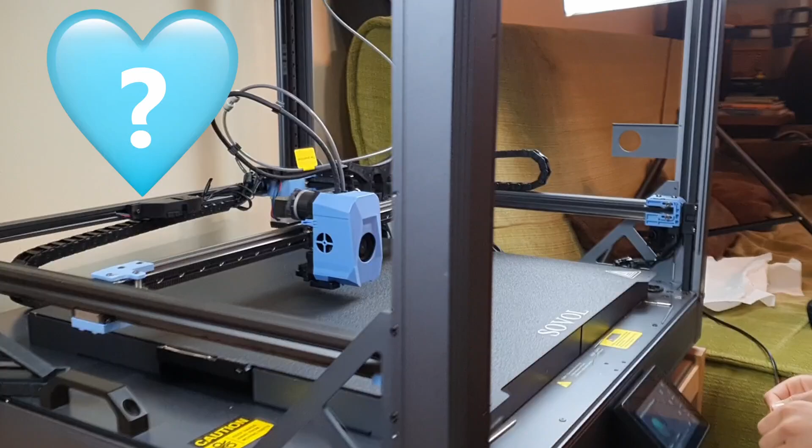Let's see what broke, what worked, and how we fixed it. And speaking of what really worked, there's one upgrade on this Max that, even with all these beta quirks, has quickly become our absolute favorite over the original SV08. I'll tell you exactly what it is before we wrap up, but see if you can guess it as we go.

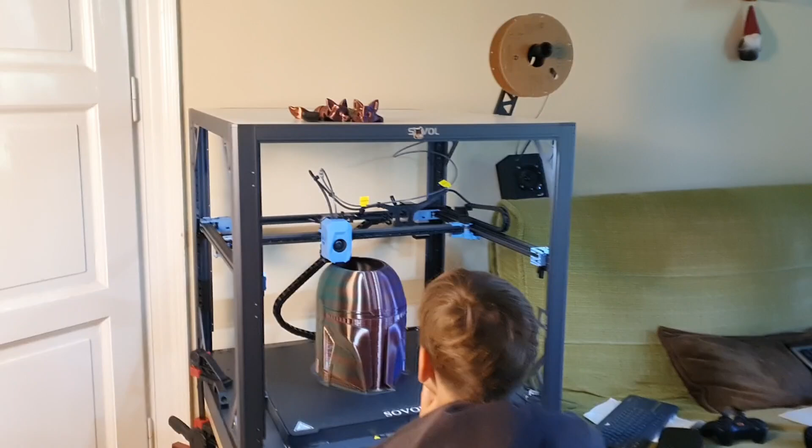Again, let me preface everything: this is a beta unit, so production machines can and likely will be very different. We will go from the most basic test prints to large functional and decorative items.

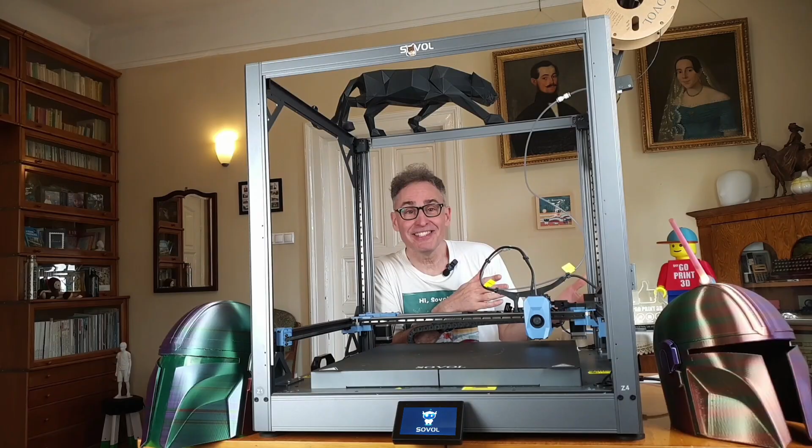Since we don't have an enclosure yet, higher temp materials are off the table for now, so we are sticking to PLA and PETG. And without the upcoming filament feeding upgrade, flexible filaments like TPU are also on hold for the time being. But even with these limitations, we will be destroying a hot end, accidentally scraping the bed, throwing out a good number of failed parts, and making plenty of software and hardware adjustments along the way.

Are you ready? Let's get into it.

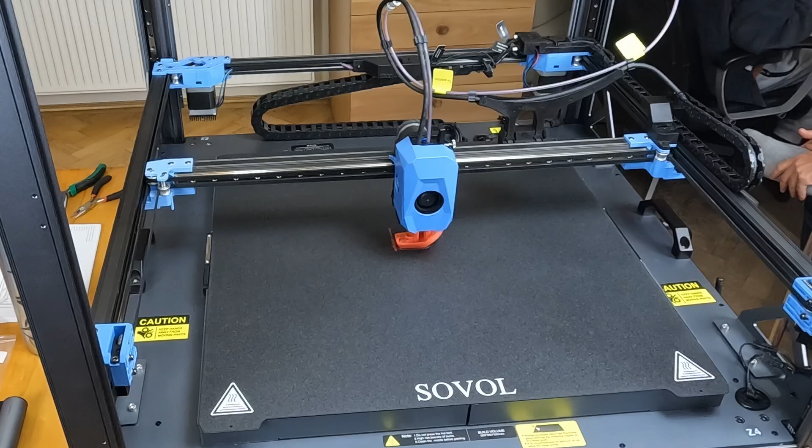Now let's kick things off with the first and perhaps most infamous test print, the 3DBenchy. Yeah, I'm sure you're not impressed by this one. The G-code for an 11-minute 3DBenchy was right there on the included USB drive, but straight out of the box, it just didn't print correctly. There was a severe under-extrusion problem, so bad in fact that the model snapped in half before it even finished printing. Definitely not the print that is going to sell the Max.

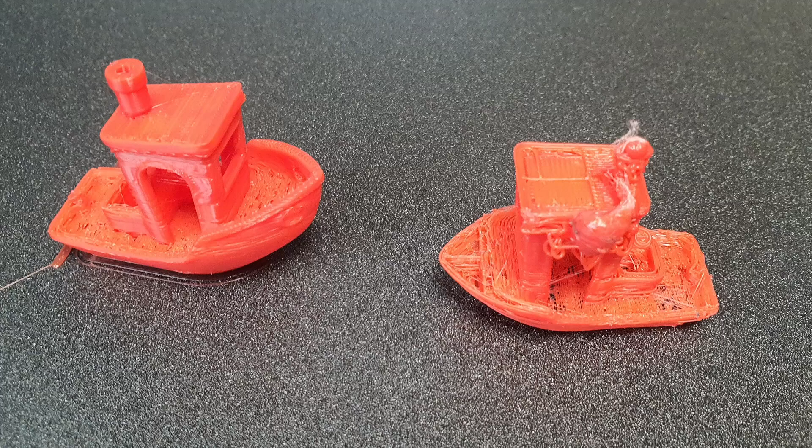Something was clearly wrong. After checking the extruder tension, which seemed to be set correctly, I tried printing the same G-code again, but this time I started bumping up the nozzle temperature. From the original and very normal 230°C, I went to 235, then 240, and finally 245 Celsius, where things started to look okay. For the third attempt, I modified the G-code to use this 245°C right from the first layer.

My beta testing colleague, 3D Print Demon, ran into the same puzzling issue with his hot end. It seems to demand much higher temperatures than usual, especially for filaments like PLA that need a lot of cooling. Beyond the lower thermal conductivity of hardened steel nozzles, our working theory is that the part cooling fans on these beta units might be aimed a bit too high, causing too much air to hit the nozzle's melt zone. Other factors could be at play, but as you see with the other test prints, simply cranking up the print temperatures became a recurring theme.

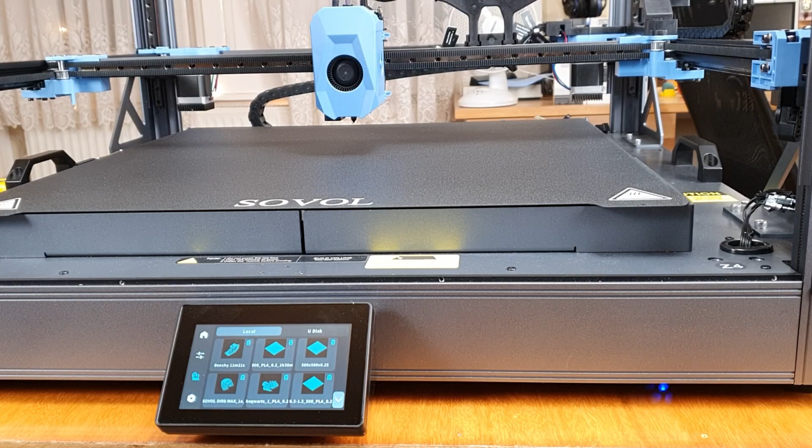If you're worried that this temperature difference will eat into the printer's maximum 350°C capability for high temp filaments, I suspect those will be less affected because they generally need less part cooling, which should reduce any of these side effects. As I mentioned in my previous video, have you watched it already?

I did have to transplant the rear part cooler from my SV08 because this particular beta unit arrived without one. When 3D Print Demon analyzed the original cooler on his machine, he noticed it was positioned 10mm lower on the Max. So in my mind, the fix for this cooling issue might be as simple as a slight redesign of the rear part cooler, aiming it 10mm lower as well.

3D Print Demon actually measured the nozzle temp and found it was consistently lower than the set temperature, but he'll likely share more details in his own videos and reviews.

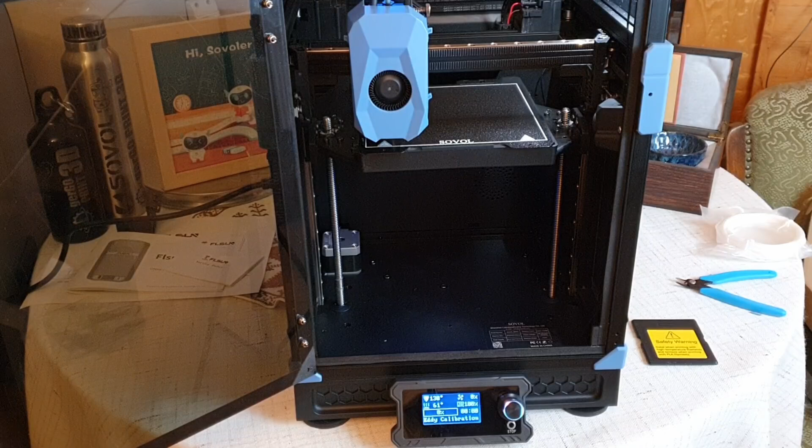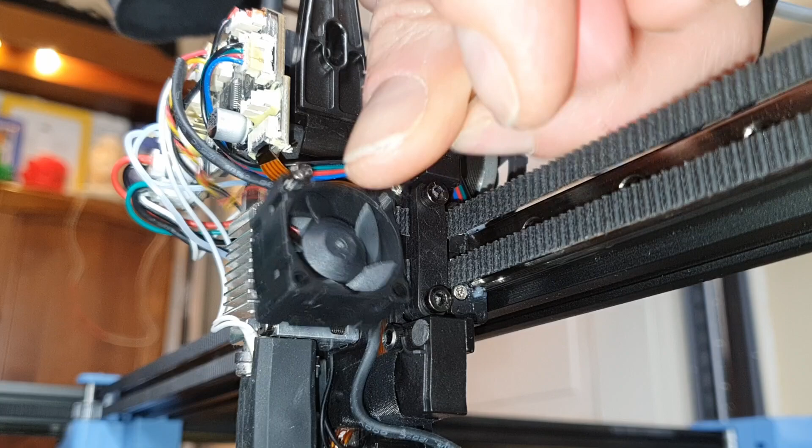What's surprising is that the tool head on the Max is identical to the one on the Sovol Zero, which had no trouble printing PLA and PETG at their usual temperatures. The Zero doesn't even need a rear part cooler on its tool head, thanks to that powerful curtain fan at the back. So I'm not entirely sure what, if anything, will need to be changed on the Max. As you'll see shortly, due to a nasty clog and a bit of my own clumsiness, I also had to swap in the complete hot end from my Zero. Even though that hot end has a brass nozzle with higher thermal conductivity, the need for higher temperature persisted. This tells us it's likely not a faulty heating element or thermistor, as those were also brought over from the Zero. And spoiler alert, swapping the hot end will have other consequences, so stick around for that.

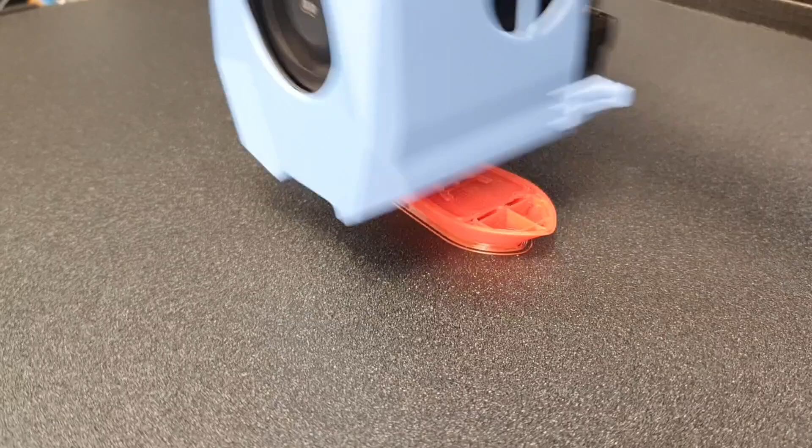Now, three other important points to consider. First, testers of the production units haven't mentioned needing higher nozzle temperatures. Also, I haven't yet received the upgrade package Sovol is sending to bring our beta units up to par with the production models. So the jury is still out on whether this will be an issue in the final version. Second, this whole temperature thing might be a non-issue for many of you, especially if you're planning to replace the toolhead anyway. The upgraded CAN bus toolhead data cable opens up a world of possibilities for Voron-compatible toolhead designs, not to mention the Bondtech INDX tool changer that many seem to be eyeing as a potential upgrade. And finally, even if nothing changes with the cooling and higher nozzle temps are needed, there don't seem to be any negative side effects from just increasing these temperatures.

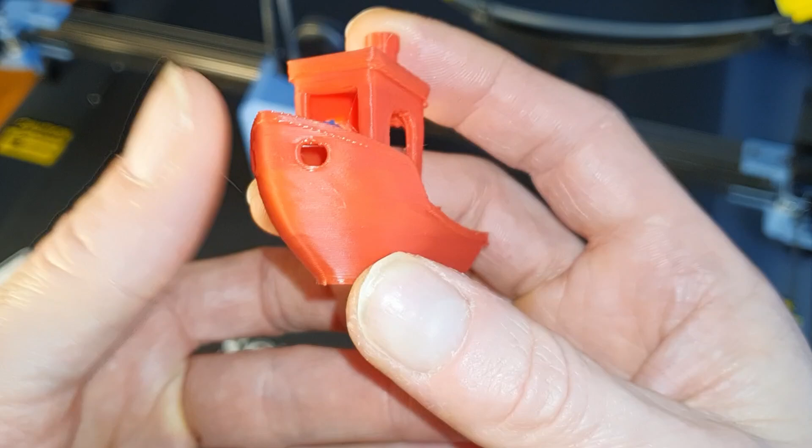Looking at that third 3D Benchy, it actually turned out pretty good for an 11-minute print. The layer height is 0.25 millimeters. Cooling seems pretty good, even though at this point I hadn't even realized my rear cooler was missing. I imagine it would be even better if that cooler was installed and working. What I really want to draw your attention to is how smooth this Benchy is. After a proper input shaper calibration, it's free of any ringing, and what's particularly interesting, no VFA or vertical fine artifacts either.

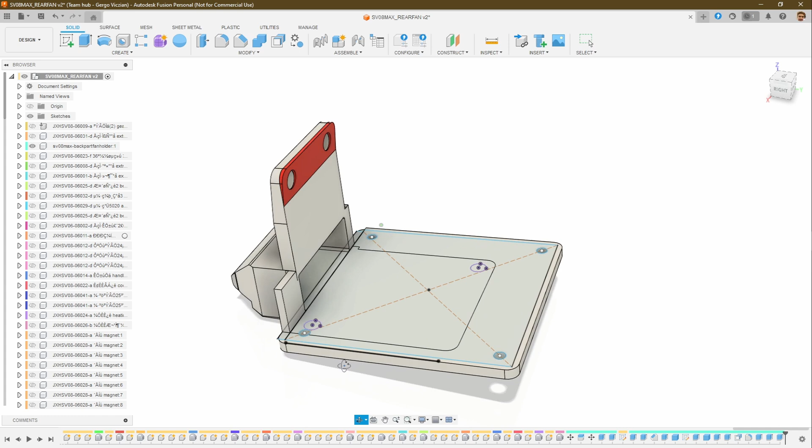After the initial Benchy success, I unfortunately wasted a good chunk of time trying to replace the missing rear part cooling fan. I didn't have the necessary 3010 fan on hand, so I thought, why not try to redesign the fan shroud Sovol published on the SV08 GitHub repo. My plan was to simply lower it by that 10mm and resize it to fit a 4010 blower fan that I did have. Well, that bright idea did not only turn out to be a total dead end, but it also ended up scraping my beautiful PEI sheet. Though, as you'll see, this wasn't entirely my fault.

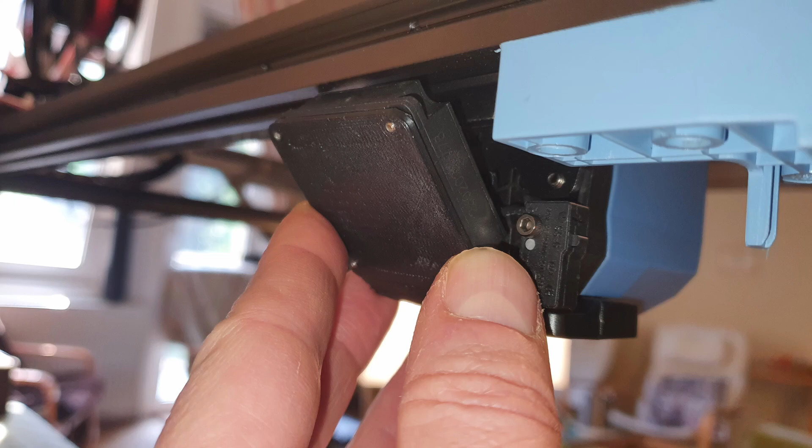You see, the big problem with trying to shoehorn in that larger fan was that it interfered with the printer's homing sequence. And if the printer doesn't home correctly, it then tries to perform its nozzle cleaning procedure in the wrong spot. Now, that wouldn't normally be a huge disaster if the nozzle cleaning plate wasn't positioned a full millimeter below the build surface. So this nasty scraped line you're seeing here, that's exactly where the printer thought the nozzle cleaner was. Ouch. This is, frankly, a potentially ugly design flaw. Any homing issue really shouldn't result in damage to this gorgeous and, believe me, hard-to-come-by PEI spring steel sheet.

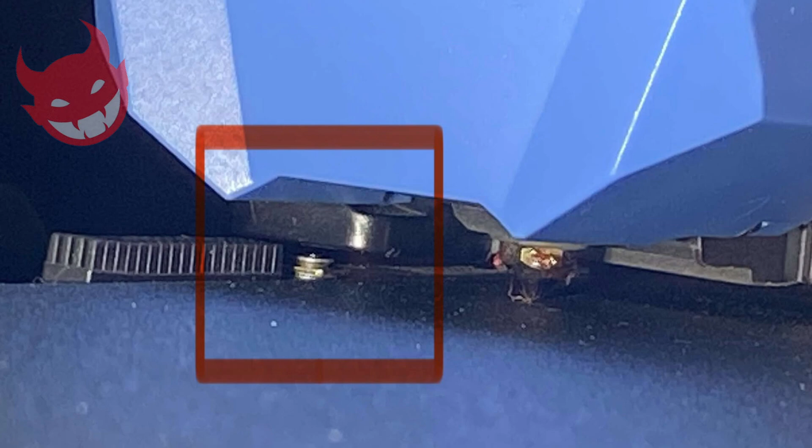Thankfully, 3D Print Demon cooked up a perfect and super easy solution. It's so simple that production units might even ship with this modification. But if not, you should definitely consider doing it yourself. Just raise the nozzle cleaner by about 1 millimeter by adding a washer or two underneath it. Then you will need to modify the nozzle cleaning macro in Klipper to perform the cleaning routines 1 millimeter higher, safely above the build surface.

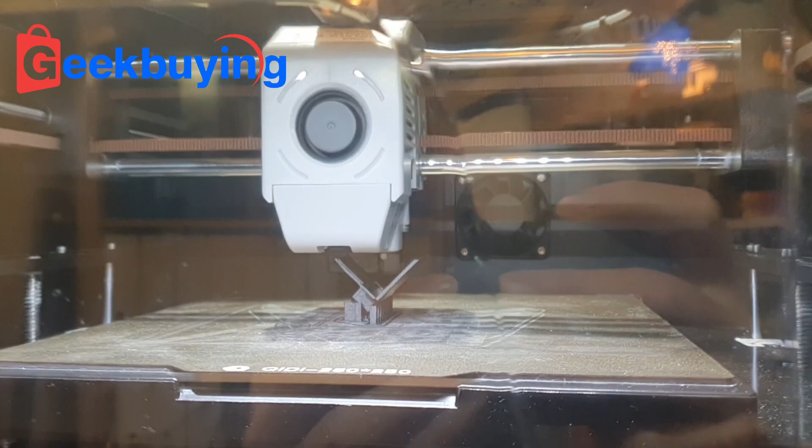After that rather pricey detour, a cost kindly covered by Sovol as they are sending a new PEI sheet, thank you Sovol, I borrowed the rear part cooler from my regular SV08. I then printed an upgraded bracket for it, designed to sit 10 mm lower using ASA on my Qidi Tech Q1 Pro with its heated chamber ideal for printing high-temp filaments. With that upgraded cooling finally in place, I set out to print this tall height test.

I had to stop this print at 459 mm because the y-axis drag chain started interfering with the filament path. But don't worry, this is just another quirk of this beta unit with its temporary filament feeding setup. We'll soon be getting the updated feeding system where the filament enters about 50 mm higher, so there'll be no danger of it crashing into the gantry.

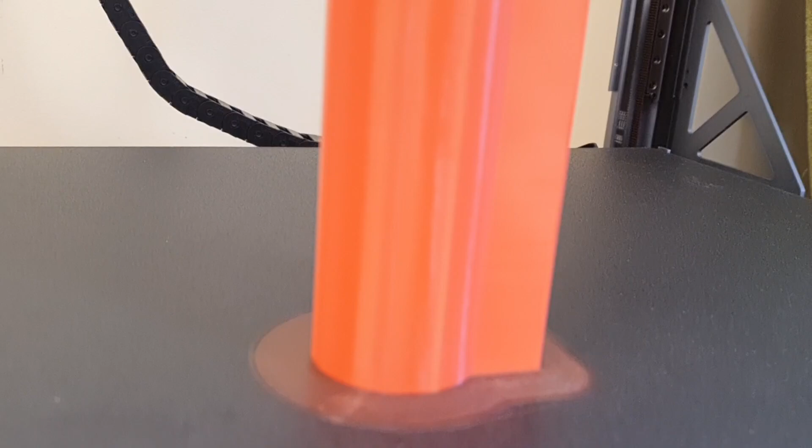Once again, I really want to highlight the excellent surface quality of this tall test object. It stands in pretty stark contrast to what some of the next prints will show us.

Before we dive into those other prints, we just had to print something that truly takes advantage of this awesome, massive print surface. So I took our favorite low poly Black Panther model by nbarb01 and scaled it up to a whopping 600 mm in length. That's about the biggest you can fit diagonally on this bed.

And just look at that first layer. Z offset calibration and automatic bed leveling are working flawlessly here. Could this be our favorite feature of this printer?

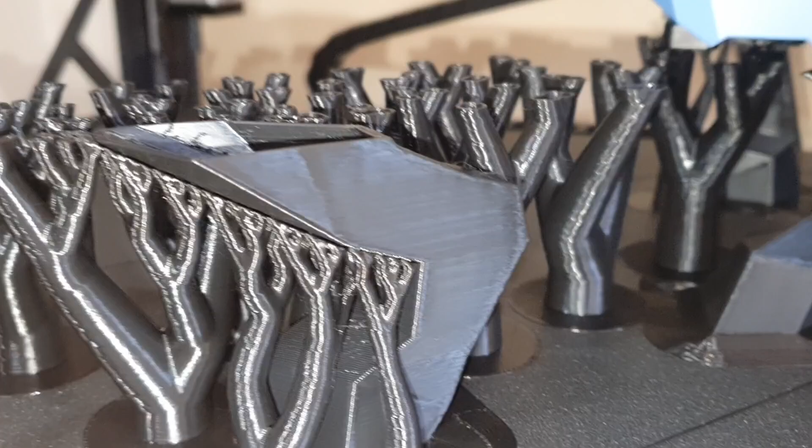This print involved a lot of tree supports, which also served as a great test of the printer's mechanics and overall reliability. I didn't try to rush this one. I printed it using Sovol PLA with the default print speeds from the stock Orca Slicer profiles, running at about 21 cubic millimeter per second volumetric flow. The only change I made was bumping that nozzle temperature up to 245 C, consistent with our earlier findings.

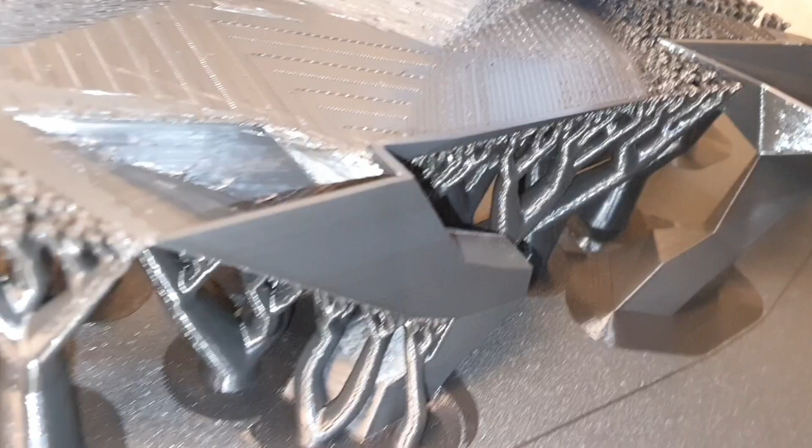We used 3 walls and lightning infill, except for the section where the tail meets the body. For that critical area, we added 15% 3D honeycomb infill using a spherical modifier in the slicer for extra strength.

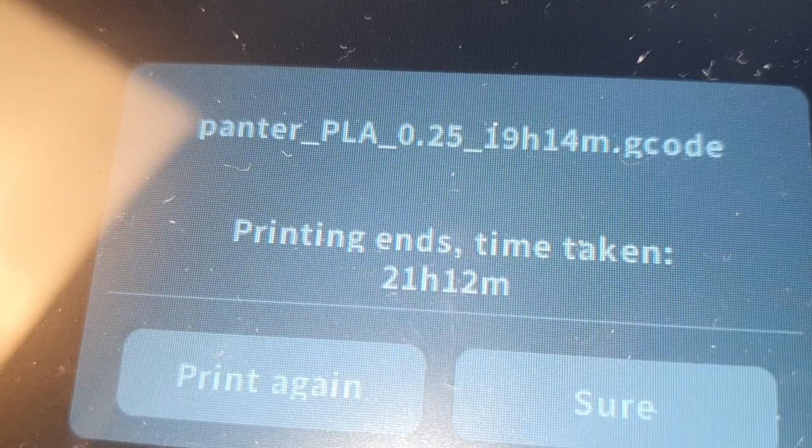One thing to note, the stock presets consistently seem to underestimate printing times. This one was estimated at around 19 hours, but ended up taking a full 21. Still, I'm really happy with how it turned out. The supports came off relatively cleanly, and the large flat areas are impressively smooth and artifact-free.

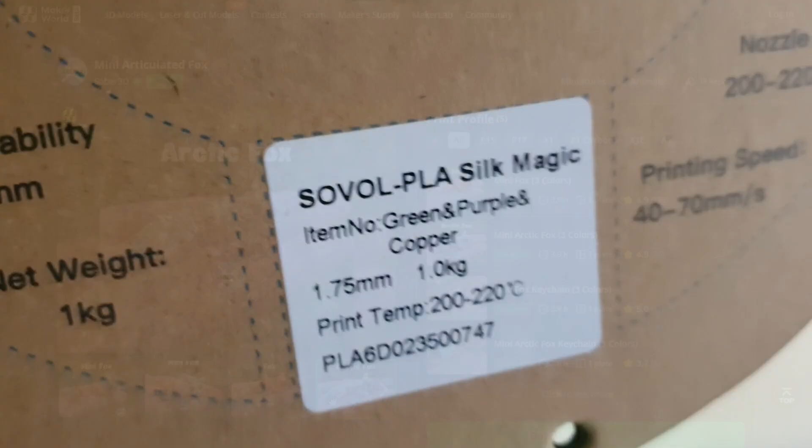All right, next up, let's try something with the beautiful silk filament Sovol sent us with the machine, starting with this articulated Fox model by Saber 3D. An articulated model like this is great for testing flow rates and print clearances, though at 200% magnification, those clearances shouldn't really be an issue.

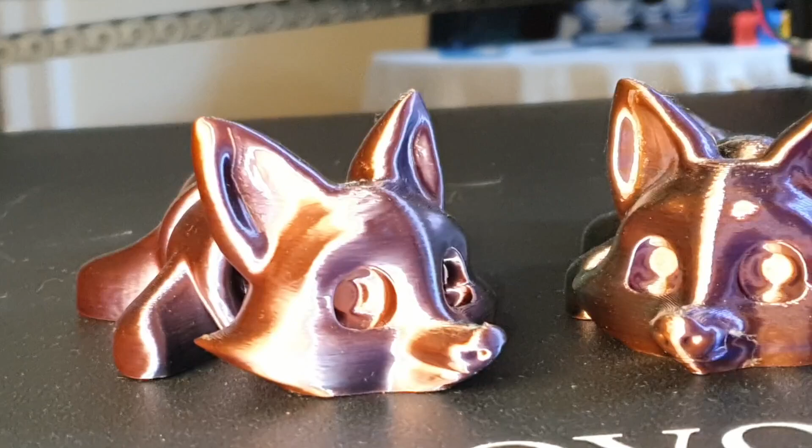It printed beautifully. However, here's an interesting observation. The exact same G-code, when printed later with a brass nozzle, resulted in a much shinier finish from the lovely 3-color filament. This is likely due to the better heat transfer of brass. And we'll see this difference again with the helmet prints.

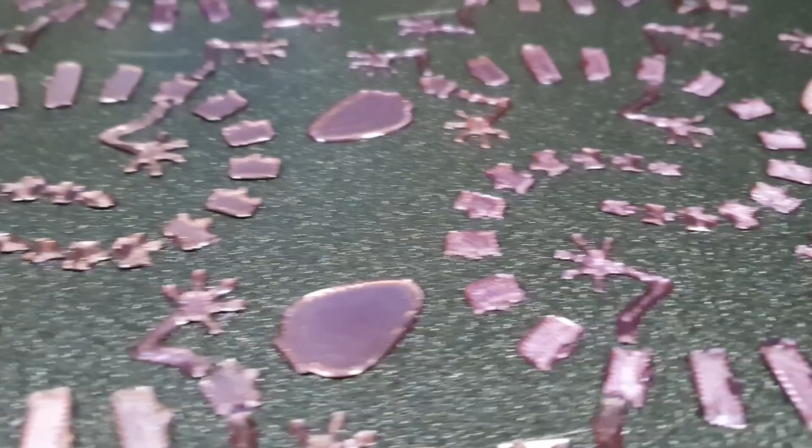This massive build surface isn't just for giant single prints though. It's also incredible for batch printing. For example, I recently printed a whole army of these articulating lizards to take to a market at an upcoming children's summer camp. On this SV08 Max, I was able to print 31 of them in a single go.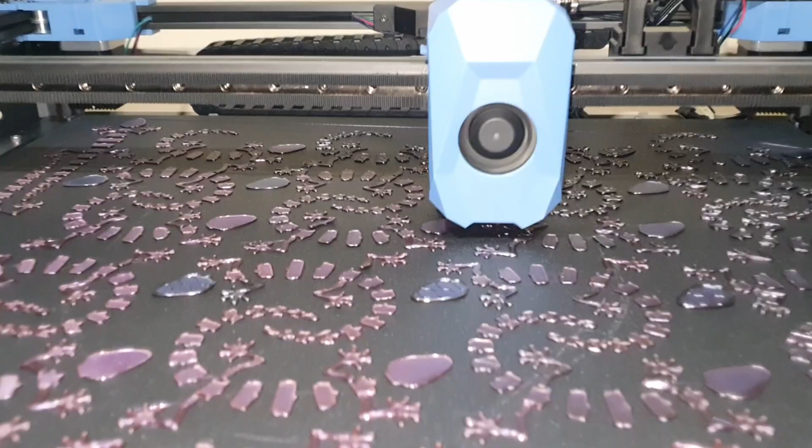To put that into perspective, my original SV08 with the 350 by 350 bed, like the Creality K2 Plus, could manage about 15 of these, half as many. And a very common 256 by 256 printer would top out at just 6 lizards per batch. So this huge bed is a massive time saver and lets you really maximize unattended printing.

This could also be incredibly handy when doing multicolor prints later on, helping to optimize purge waste when you're printing many parts. Being able to reliably use this entire massive surface for batch printing like this is a huge plus.

Is it the biggest plus? Possibly one of the contenders for our favorite upgrade. We'll see. Alright, time to go large. But big prints bring big troubles.

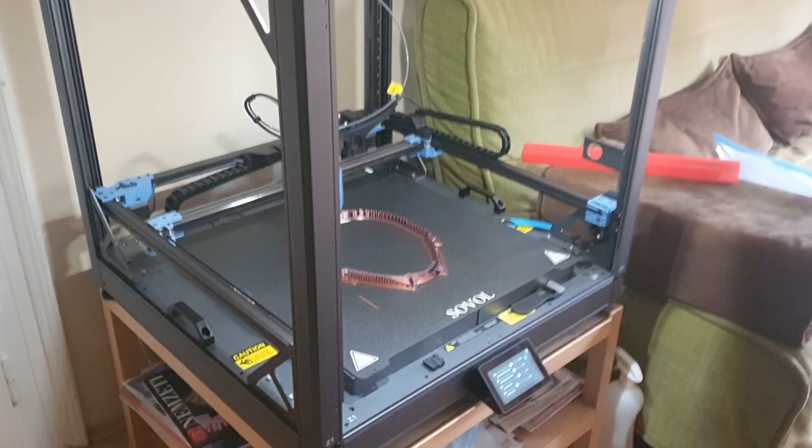I sliced this popular Mandalorian helmet model by the Broken Nerd 83, the designer's name kind of foreshadowing the experience, perhaps, from Thingiverse, aiming for a 16-hour print. But I had to restart it pretty quickly after the first attempt.

If you look closely, only 2 tiny points of this model actually touch the build plate. The rest is propped up on these snug supports. And impressively, no supports at all for the dome inside.

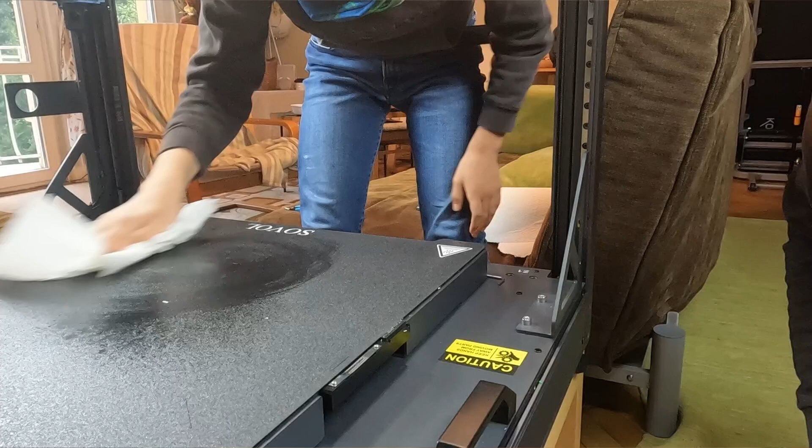Critically, during that first run, one of these tiny contact points just didn't stick well. So I cancelled it, paid extra close attention to cleaning the PEI surface with my trusty 99% isopropyl alcohol, and the second attempt was off to a much better start.

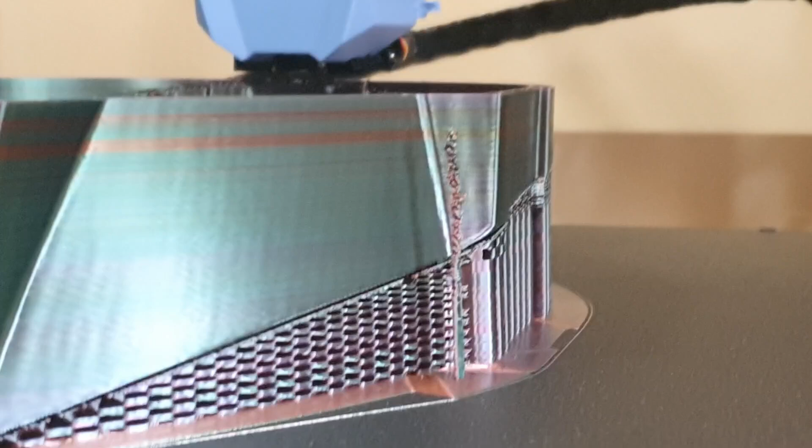Now, I have a few other relatively expensive machines to compare this to, and yes, the surface quality could be better, but for a printer of this size and speed, it's certainly passable. I'm not seeing any obvious banding or VFA on the smooth vertical areas, except of course on the snug supports in the center opening, where print quality isn't really a priority.

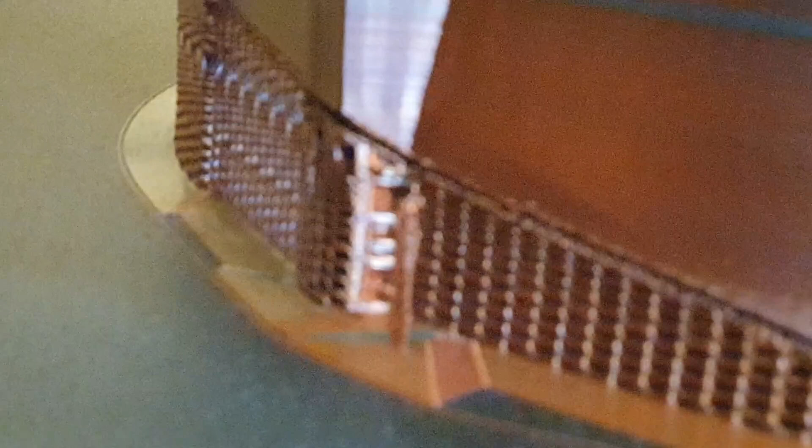The 3-color filament did twist a few times along the very long path from the spool to the extruder, which is what's causing those interesting color changes you see.

No matter what we tried in Orca Slicer, we could not get rid of those 2 stupid skinny supports, which quickly collapsed anyway. It led to some rogue extrusion near the 2 earpieces, but thankfully that debris is fairly easy to scrape off at the end.

Some of you might have pointed out this top panel. It's actually just a piece of an old election poster. I've built a whole enclosure out of that stuff before. You can watch that video if you're interested.

Its main purpose here is to offer some temporary dust protection for the exposed linear rails. Not super effective, but better than nothing. It's also a handy spot to store light things on the top of the printer.

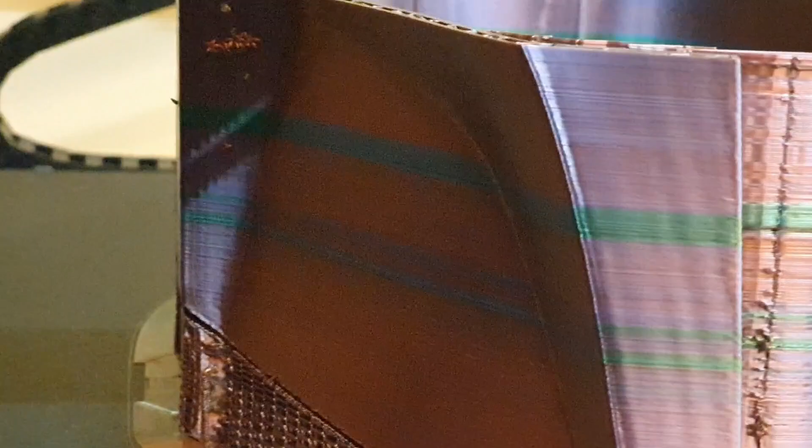The other temporary additions are these 2 clamps I'm using to secure the printer to this 700 by 700 millimeter table, which is barely big enough for this machine. I know it's not ideal from a resonance dampening perspective. It's just another temporary fix until I can design and print some TPU feet to stop this beast from trying to jump off this IKEA coffee table.

Things were progressing, but then one side of the central supports collapsed and scraped against the tool head. Luckily, just bending and snipping the curled up piece avoided any further trouble, and the support even managed to recover later on. But soon after that, the whole print had to recover from something much scarier.

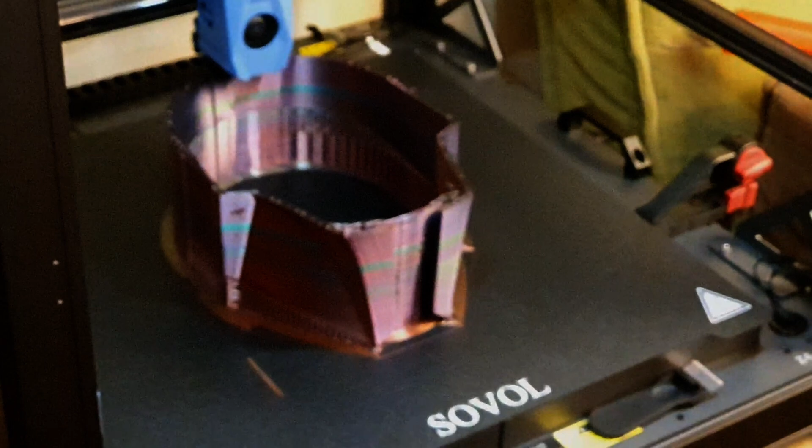I was still awake, working in my office next door, when I suddenly noticed the absence of the usual printer noise. The fans had stopped. I rushed over to check, and sure enough, Klipper had crashed with a bed heating verification error, stopping the print 11 hours into its 16-hour journey.

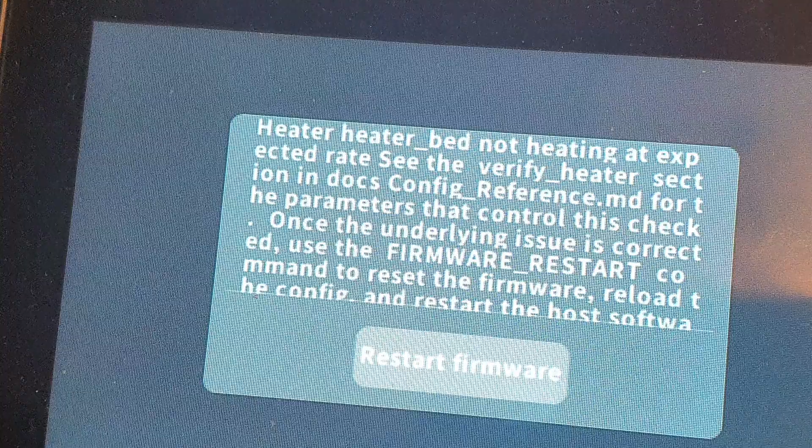The bed felt like it was still at temperature though, so I did the classic IT Crowd fix. I turned it off and on again, hoping the power loss recovery, or PLR, would, well, recover. And yes, upon powering back on, it prompted me if I wanted to continue calling. An interesting bit of translation there.

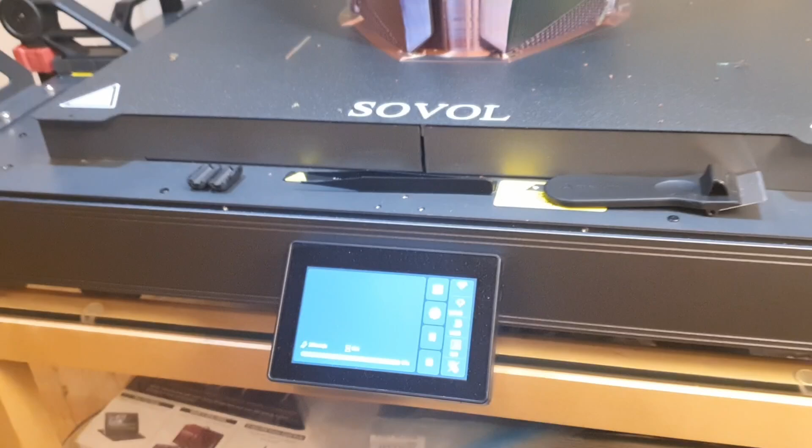This beta software has quite a few of these language quirks on the device screen. You can see the bed at this point was just 1 degree below the target printing temperature.

The software recovered beautifully. It resumed keeping the bed at 65°C and then heated the nozzle to 160°C first, which is above PLA's melting point, before moving the tool head away from the spot where it had parked itself and fused to the print.

I quickly snipped and later cleaned that contact point with a flat cutter. This preheating to 160 degrees is crucial for PLA, but it might not be enough for higher temp filaments. Hopefully the PLR routine is smart enough to adjust for those, but that's something we don't know yet.

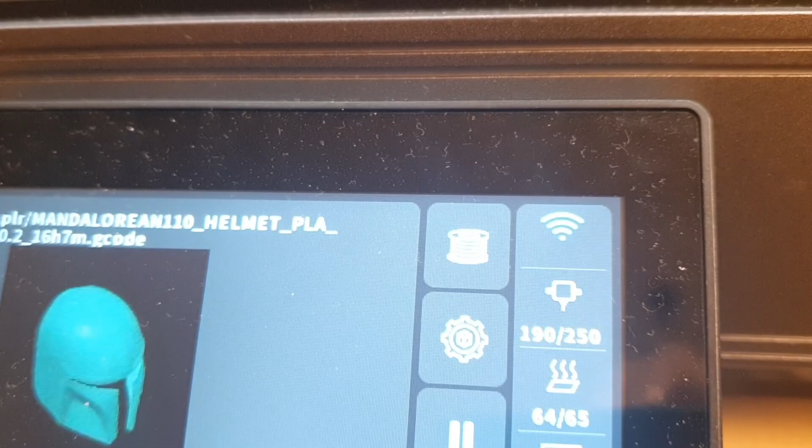And with those higher temp materials, opening an enclosure door to clear a blob could cause warping too, a different kind of disaster. But since we're printing PLA here, the PLR was progressing okay.

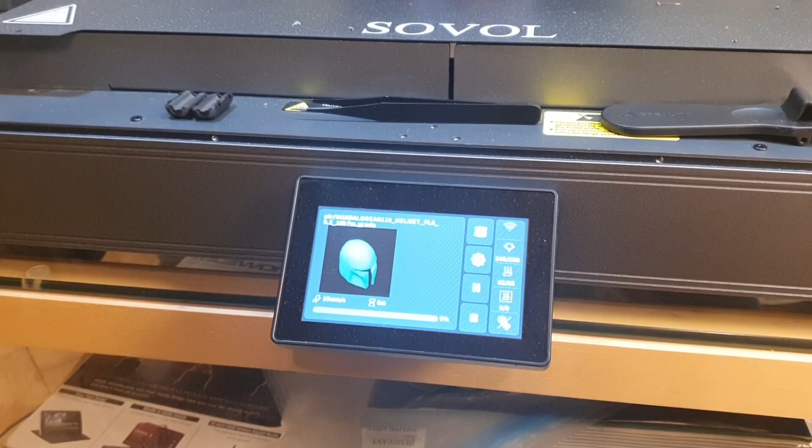As you probably noticed during that recovery sequence, the tool head then homed only in the X and Y. The micro switches in the end stops provide much more precise positioning than the sensorless homing on the original SV08, which means significantly less horizontal shifting at the resume point.

Now either the software resumed one layer too low, or the motors had sunk a tiny bit despite having dampeners, because there was a lot of scraping and nail biting for me during those first few resumed layers.

But that good old first layer bed adhesion proved to be an excellent foundation, and the print survived the disaster with just a faint line, which luckily even fits with the helmet's design.

A solid foundation. Could that be the secret to our favorite update on the Max? Keep those guesses coming, and I'll tell you for sure at the end.

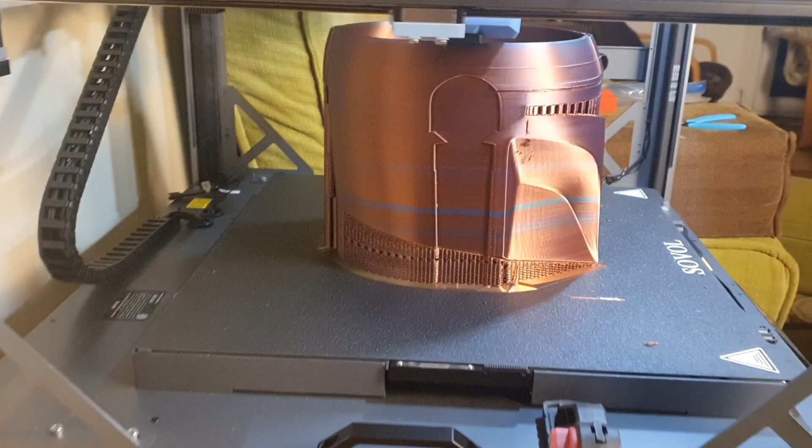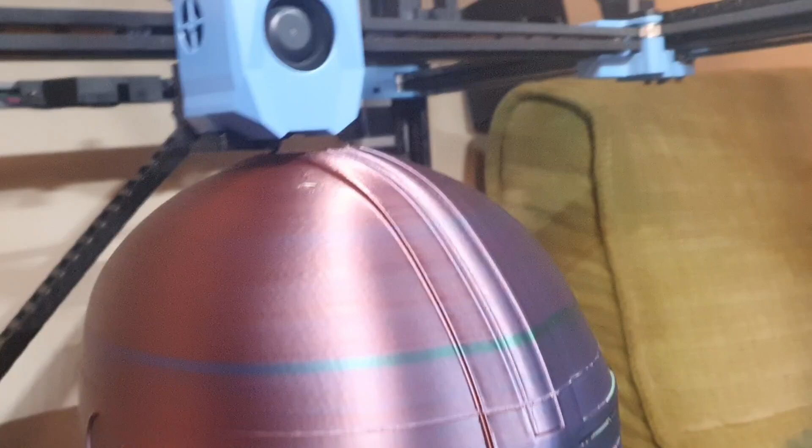After all that excitement, I went to bed, really hoping that heater verification issue wouldn't pop up again. I woke up to the satisfying sight of the last few millimeters being laid down on this now close to perfect print. With that unwanted intermission, the 16-hour print eventually took 17 hours to complete.

The only real casualty was the time-lapse footage, as only the part after the recovery was rendered. But crucially, this experience has actually reinforced my trust in the SV08 Max's overall reliability and its ability to handle unexpected issues.

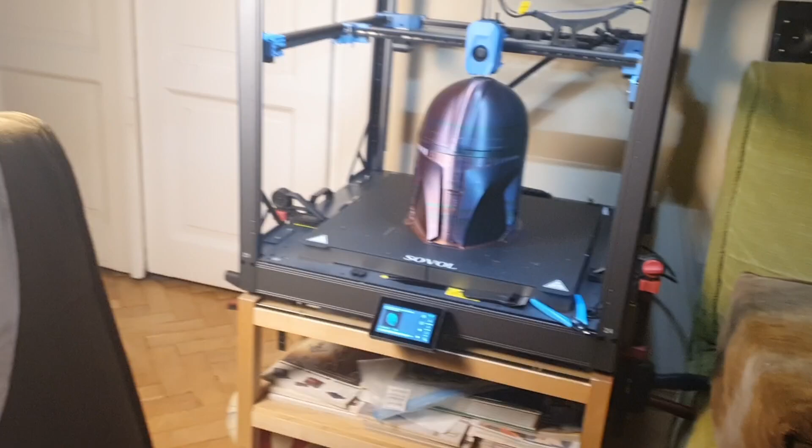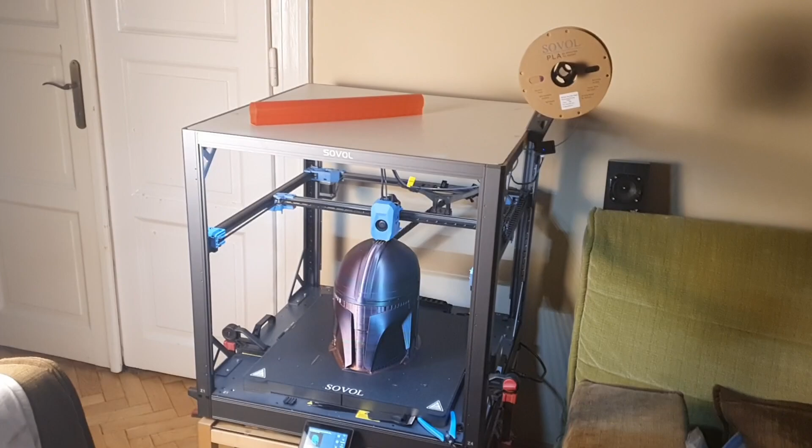The bed heater itself is well sized. It only needs about 10-30% power to maintain 65°C, so the error wasn't due to an undersized heater. After discussing it with the Sovol team, we slightly adjusted the bed heater settings in Klipper to give it a bit more leeway while still keeping everything safe. These new settings have been tested with more day-long prints, some at even higher bed temperatures, and they've all been free of this particular problem, though not entirely free from others, as you're about to see.

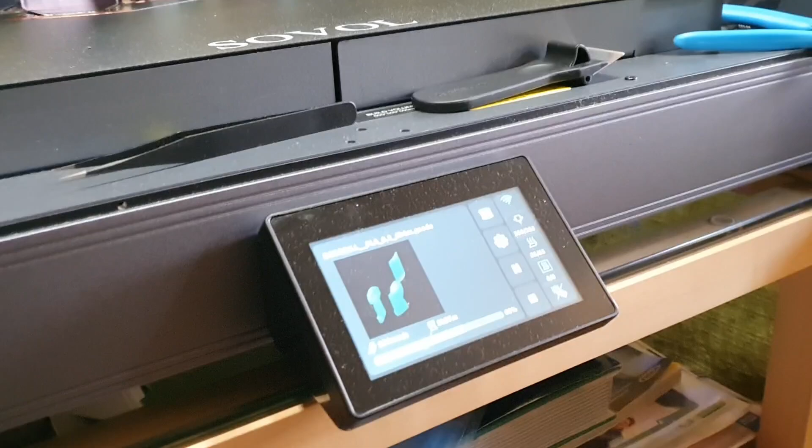True disaster struck while printing the last few parts of this Mando helmet, the earpieces. The first batch printed mostly fine, with just one piece detaching and failing. Klipper's exclude object feature did its job perfectly, and I just continued printing the rest. It was while reprinting that one last missing piece that an innocent mistake, or perhaps not even a mistake, more like a perfect storm, occurred. The filament ran out, but its very end got snagged at the entrance of the runout sensor and didn't actually trip the detector. This set off a chain reaction of problems that eventually led to the complete destruction of my hot end. Yeah, that was all on me, by the way, but still.

It's worth noting that this whole issue likely wouldn't have happened on the final production unit. Sovol is replacing this simple runout sensor with a more advanced filament movement detection and advancement system. But back to the tragedy.

Without proper tangle or runout detection, the strong extruder just kept pulling and grinding away the other end of the trapped filament. Eventually, this completely clogged up the hot end. I took it apart to investigate, but the stem of the nozzle had somehow fused itself to the copper lining of the heatsink in the cold zone. When I tried to remove the piece of filament, the nozzle stem got pulled right out of the heatsink with it. The real problem arose when I tried to reinsert that nozzle stem back into the heatsink.

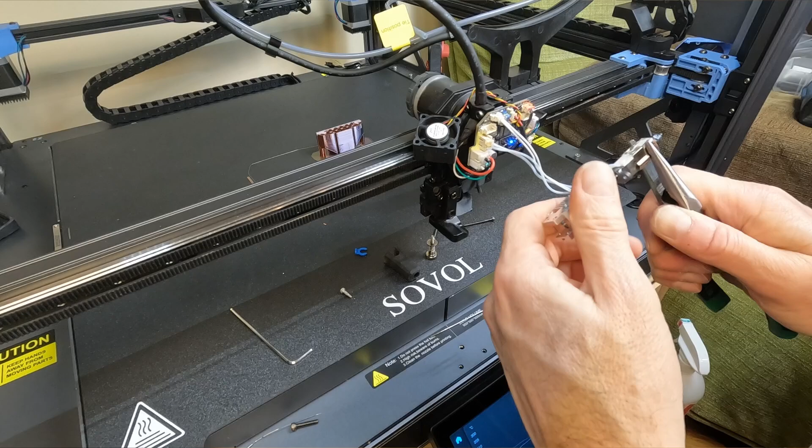I'm still not entirely sure how this is supposed to be done properly. No matter how I heated or cooled the two parts, hoping thermal expansion would work its magic, it just got stuck halfway in. I couldn't push it further in, couldn't pull it out. Eventually, I resorted to cutting it off with my new Dremel and drilling out the copper lining. By that point, the whole thing was completely ruined. All further testing of the SV08 Max screeched to a halt.

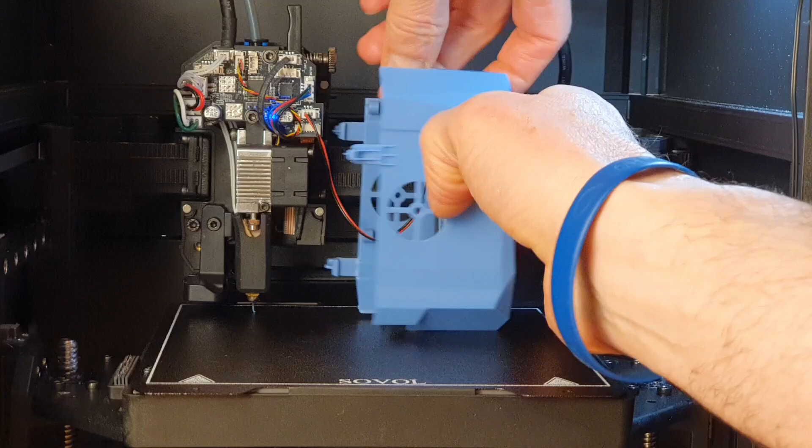But only for a moment. Then I had a brainwave. My Sovol Zero has a matching hot end. So after demolishing my Zero for its replacement part, I now had to temporarily retire my Zero as well, at least until the replacement hot end arrives from Sovol.

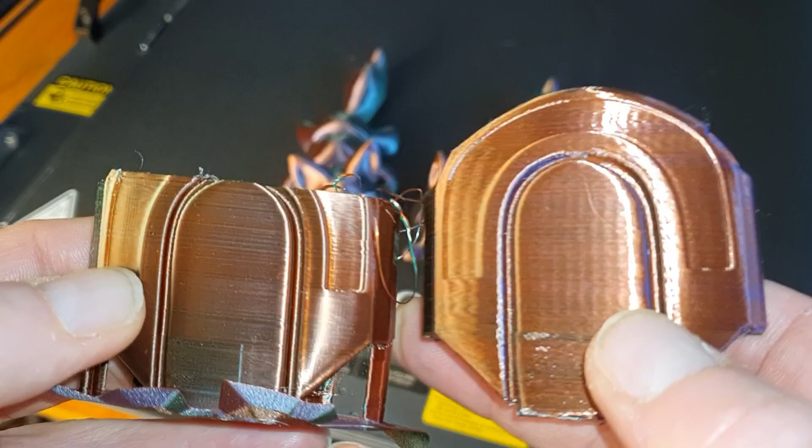Now, this replacement hot end from the Zero came with a brass nozzle, which I didn't swap out for the original hardened steel one. This gives us an interesting chance to compare print results between the different nozzle materials, though both are still 0.4 millimeter. With the silk filament, we not only got a shinier print surface with the brass nozzle, which is kind of expected due to better thermal conductivity leading to a slightly higher effective filament temperature, but also started seeing more pronounced vertical fine artifacts, or VFAs. This is harder to explain as I only moved the hot end itself, keeping the original heaters and even the extruder fan, and of course not touching belt tensions or anything related to the motion system. Notice how much smoother the surface was on that last earpiece printed with the original hot end.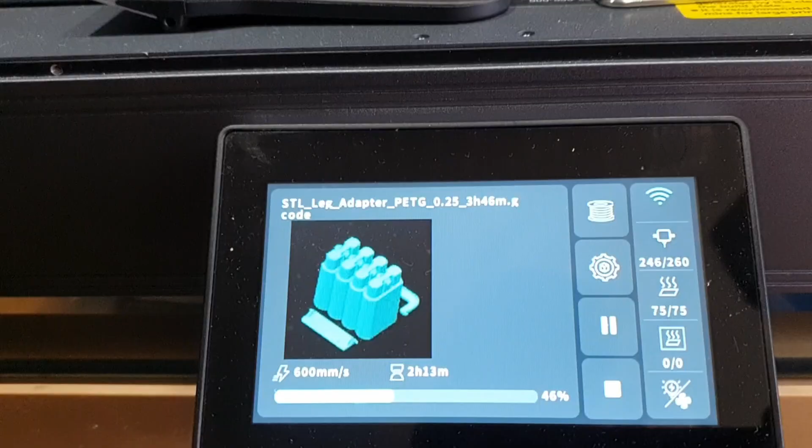To save filament while we figured things out, we excluded all but one of the green objects from that batch, and then, while that single piece continued to print, we progressively increased the nozzle temperature from 245 Celsius. Once we reached 260 degrees, the layers on that test piece started to look much better. So for the reprint, we used 260 degrees from the start. We also increased the bed temperature in the slicer preset to a more typical 75 degrees for PETG.

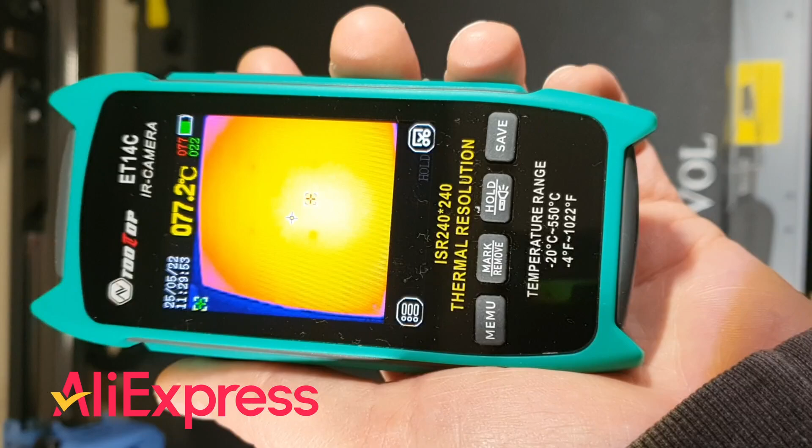The bed heater, with its adjusted Klipper settings, handled this perfectly, and our new thermal camera from AliExpress confirmed nice, even heating across the entire build surface. To ensure our PETG was dry, especially since it's more hydrophilic, we utilized our single spool Sunlu filament dryer.

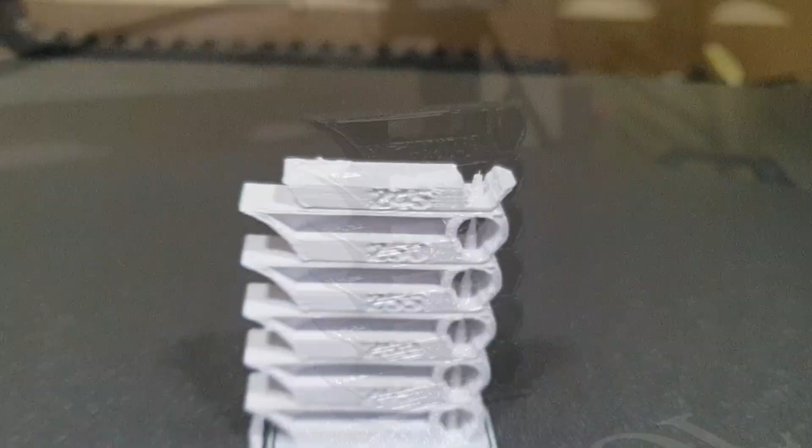After the quick temperature tuning we did with the green PETG, we ran a proper temperature tower for the white PETG we plan to use next. Then, before printing the main event, the black case and seat combo, we also ran a flow rate calibration test. If you need help with all these filament tuning tests, I recommend our earlier video on the topic.

That flow rate test finally pointed to the main culprit for the remaining issues. Sovol's default max volumetric speed setting of 21 cubic millimeters per second was just way too high for PETG. Bringing it down to a more reasonable 14 finally fixed the extrusion consistency.

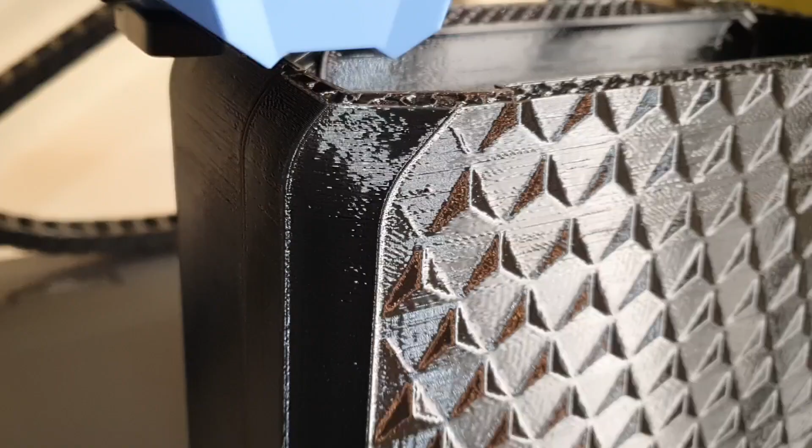The last component, the black case, came out much more evenly extruded. However, we are still not entirely happy with the surface quality. Something definitely changed after replacing that hot end, and the investigation continues. This is a practical little stool. The under-extruded legs had no problem holding Levi's weight, but later

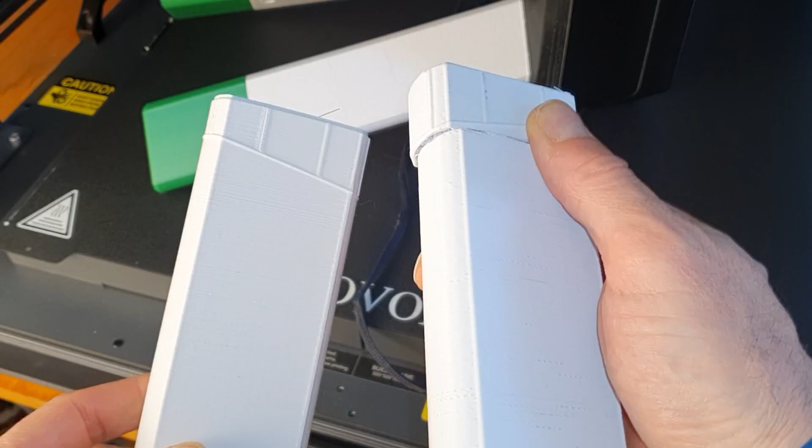when I tried it, one of the white legs broke. But I reprinted it using the updated flow rates, and now it is much stronger.

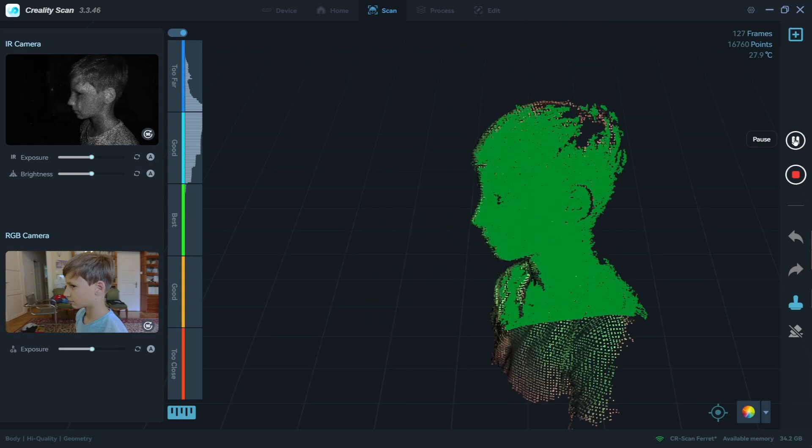Of course, that first Mandalorian helmet was way too big for Levi, so we rescanned his head. He has much shorter hair now than last summer when we originally 3D scanned him. If you're interested in our experience with 3D scanning people, you can check out our video on the Creality Ferret Pro.

Anyway, reprinting the helmet scaled down for Levi gave us another good opportunity to compare the print results for the two different hot ends. For this second helmet, we used a layer height of 0.25 instead of the 0.2 millimeters we used on the first one. And the slightly reduced overall size also helped make the print quicker.

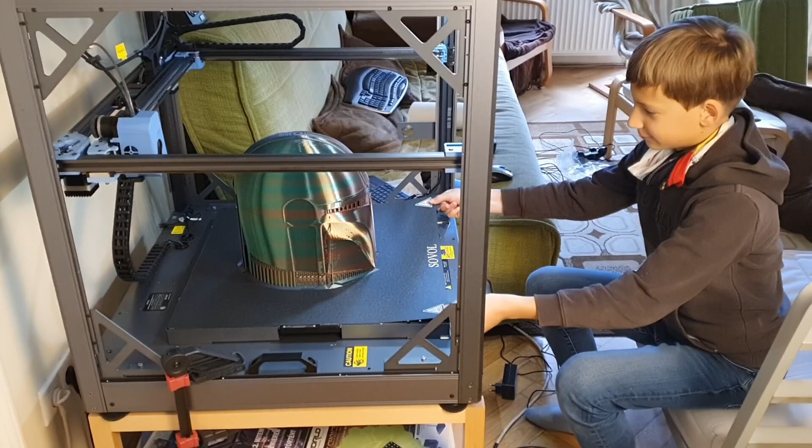This time, thankfully, there were no mishaps during this 15-hour completely successful project. Given the exceptional capabilities this printer has shown, especially for large items, the opportunity to create a full Mandalorian costume has opened up, and we are excited to pursue that.

Stay tuned for updates. Before we get to our absolute favorite upgrade on this SV08 Max, let's quickly recap.

So there you have it, an unfiltered look at our journey with this beta unit, all in the effort to make the final production model as reliable as possible for everyone.

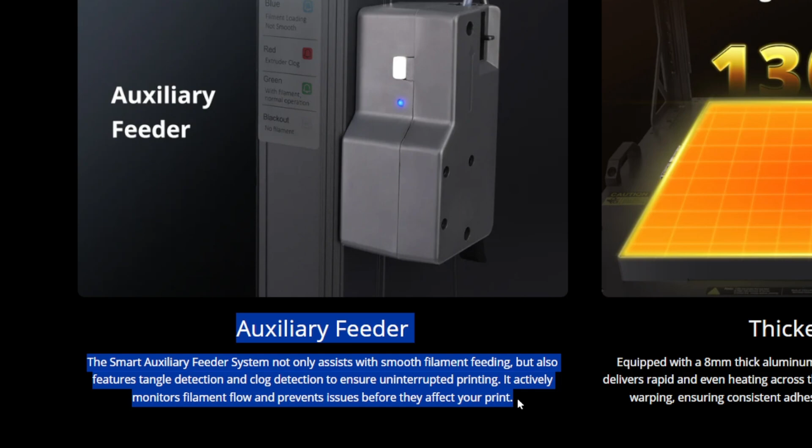You can expect a follow-up video detailing our experience once we receive the upgrade package from Sovol. I also plan to post about silencing the cooling fans once those parts arrive. And no, we haven't been totally discouraged from trying to install Klipper on this beast either, so that might still happen too.

All right, so after all that, what is it? What's the one feature that has quickly become our favorite single upgrade on this SV08 Max, especially compared to the original SV08? I hope some of you guessed it along the way. For me, without a doubt, it's the new bed.

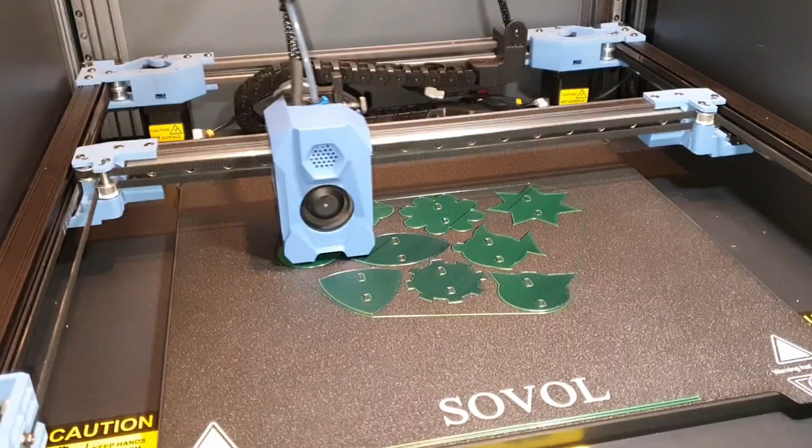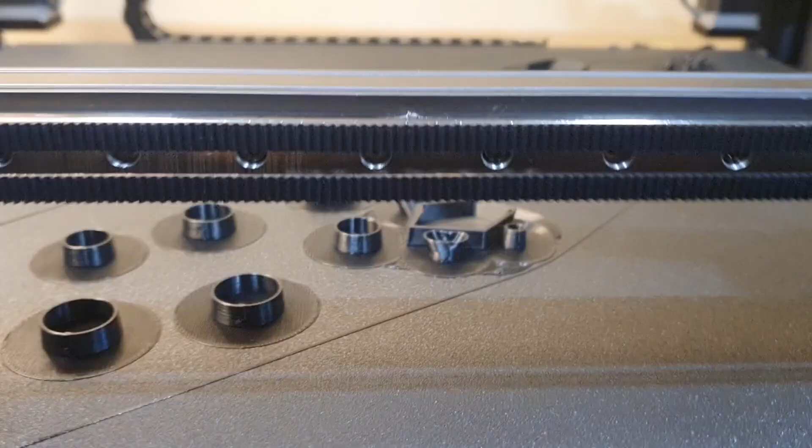While we personally never had major issues with the original SV08 bed, we know for some of you it could be a real pain point. Well, Sovol has clearly listened. This new high-quality, 8mm thick, super flat and incredibly robust, quick heating bed, combined with the effective auto-leveling, has been an absolute dream for first layer adhesion and consistency, even on these large-scale prints. It just makes using the printer of this scale so much more reliable and enjoyable.